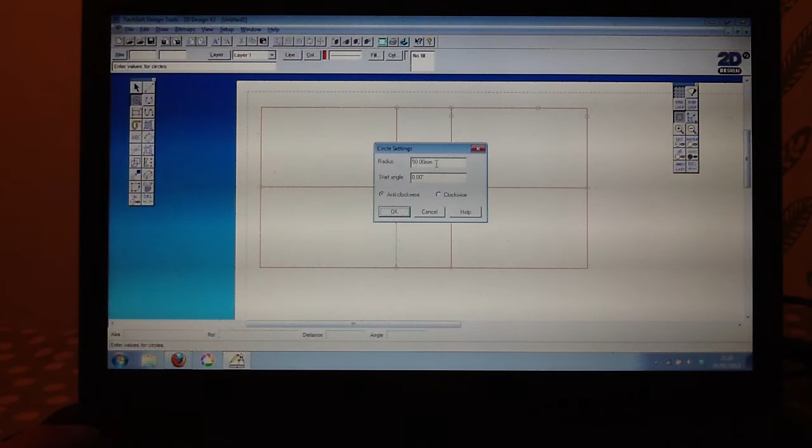First circle I want is going to have a radius of 3, or a diameter of 6. And notice, because I've got my attach button on, again I've got that little box. I'm going to attach that there.

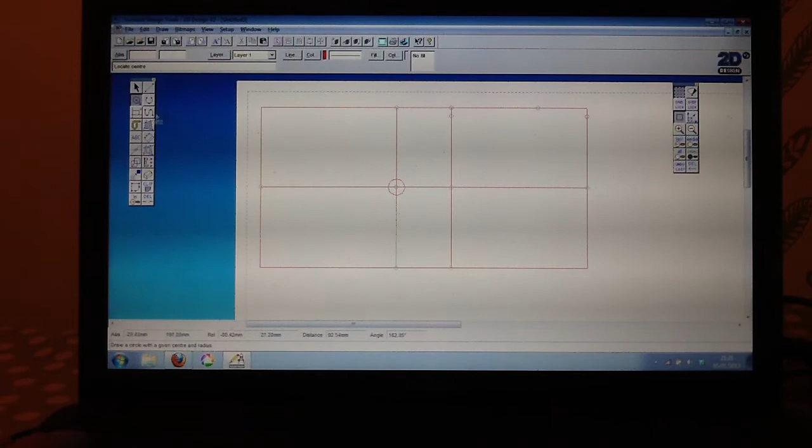I'm going to go back to my icon, double click, and this time I want a circle with a radius of 4. And this circle I'm going to attach here.

Now that I have most of the set lines in, I'm going to begin to draft in my shape. I'm going to click on my line, and then go across to my attach button.

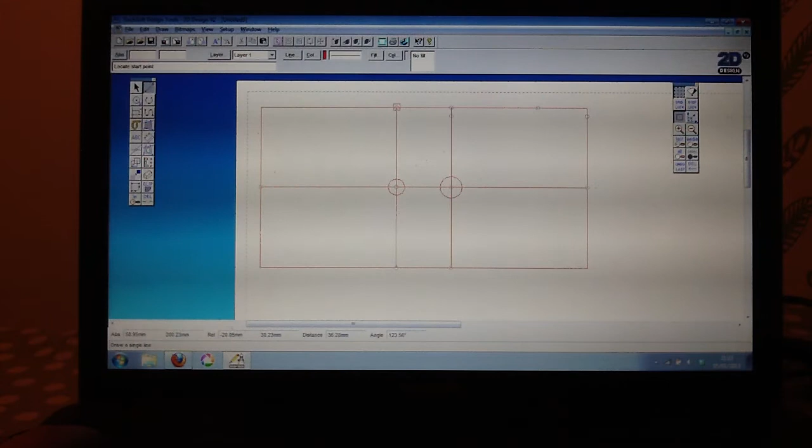Notice my grid lock and step lock are both de-highlighted. If I double click on attach, at the moment it will only attach at the end point or a node. If I click on the nearest point, that will allow me to click on a line, for example here. My attach is on, and I go down and click on the nearest point on that circle.

Now we may need to alter that in a little while. I'm going to go up to here, click on there, and again similarly down to here. What I need to do now is draw a line from there to there.

Now we should have all the points and lines necessary to begin the construction of our sellotape dispenser. The first thing I'm going to do is drag, once I've clicked on pointer, an imaginary box over that shape.

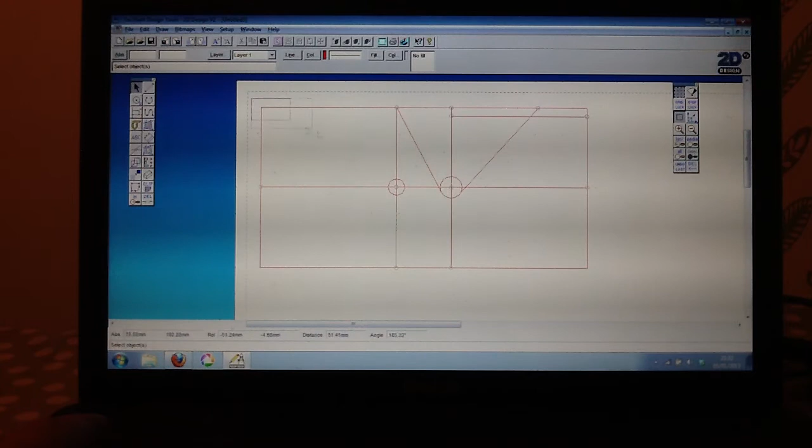I'm going to go up to the top of the page and click on group, and I'm going to click on the copy and paste function, which are the two boxes at the bottom. Copy and paste that just in case I make a mistake.

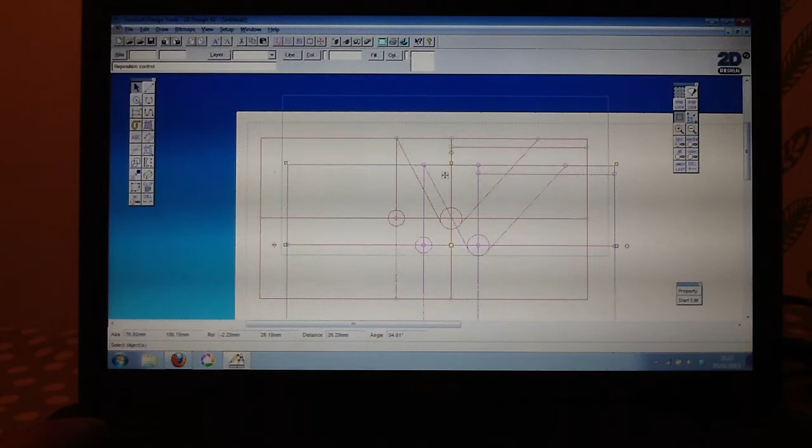If I click on the middle button there, that will allow me to position that somewhere off in free space, available later should I need it.

Okay, the next thing we're going to do is remove some lines that we don't need. I'm going to click on Del and make sure I go across to the second button, which is deleting part of an object, and I'm going to get rid of the lines that I don't need.

The first ones are these guidelines here.

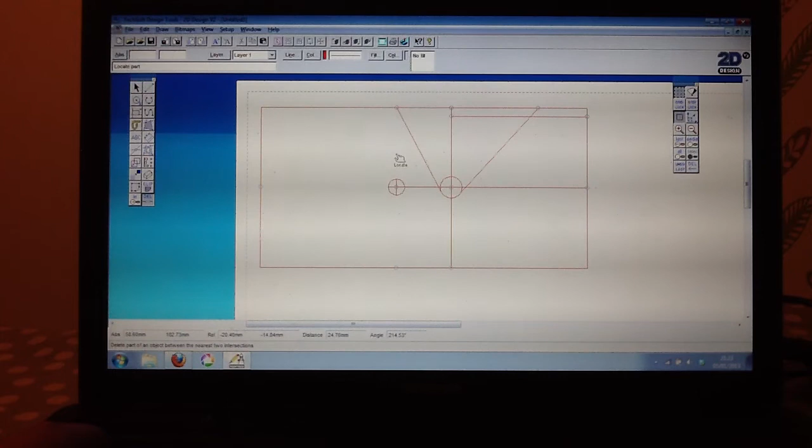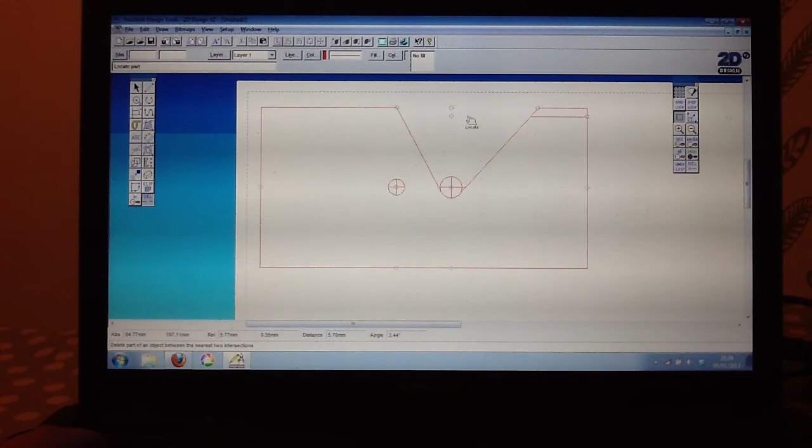The second ones are the less obvious ones. Don't worry about leaving construction points there. You can always remove those lines there because they're not needed. I might leave those in because we might use them later.

Okay, now it's worth checking at this point whether these lines that you drew at a tangent to that circle are accurate. Again, go back to In, drag an imaginary box over, and you can see in this case they seem to be okay.

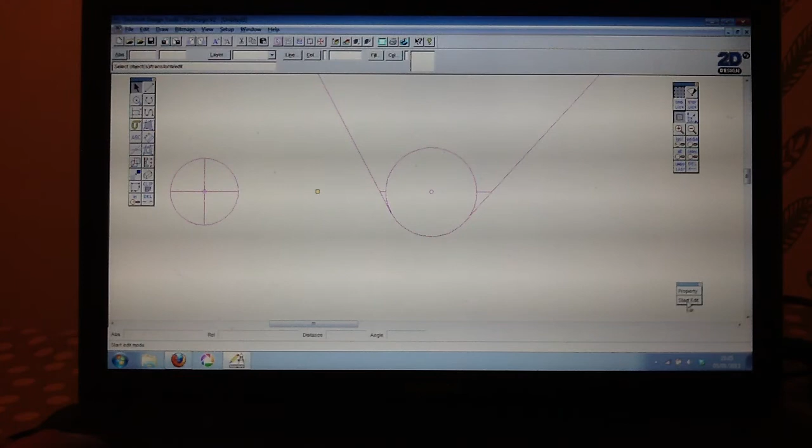But what I might do is click on pointer, click on the line, start edit, and just double check that those lines are exactly where I need them. You can zoom in further if you wish.

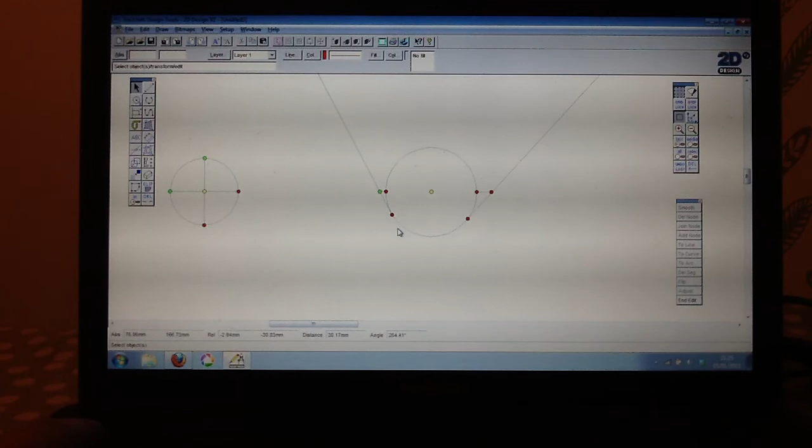Sometimes they just slightly miss the mark. When you're happy with that, end edit, go back to Del, and you can delete that part of the circle.

Notice here we have a part of that line. You need to remove that because that will cause you problems later.

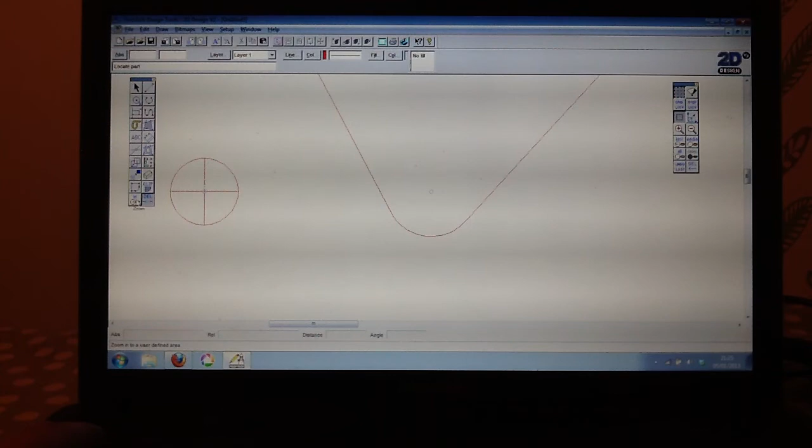If you go back to your zoom in and hold your button down and go to last, that will give you your last zoom. Okay, what we've done now is get the inner shape for the sellotape dispenser with that curve there.

We're just missing one more line here, which I'm going to go back to construction points, make sure I have my construction point at an intersection, and then from there.

I'm going to do the last line and delete the last few lines that I don't need. Again, don't worry about the shapes too much at this point, and the construction points can be left.

It's worth noting here that at this point you can, if you see any, remove any stray lines that you might still have. For example, there's one there as well. That should cause you less problems later on.

And that is your basic shape for your sellotape dispenser, which we will later edit to produce the shape that we want. Again, what I'm going to do is click on it or drag an imaginary box around it after clicking on pointer.

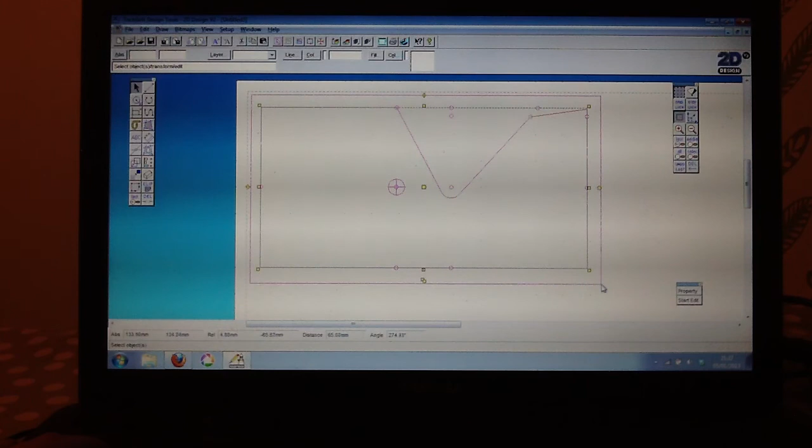I'm going to copy and paste that, and then I'm going to move that up into free space.

Another advantage of using copy and paste and keeping a record of what you've done is it shows your progression as well. You can later put those onto your page and print those out to show how you've progressed, and it gives you a reminder as to the sizes and shapes that you started with, as well as having the last shape that you needed should you go wrong.